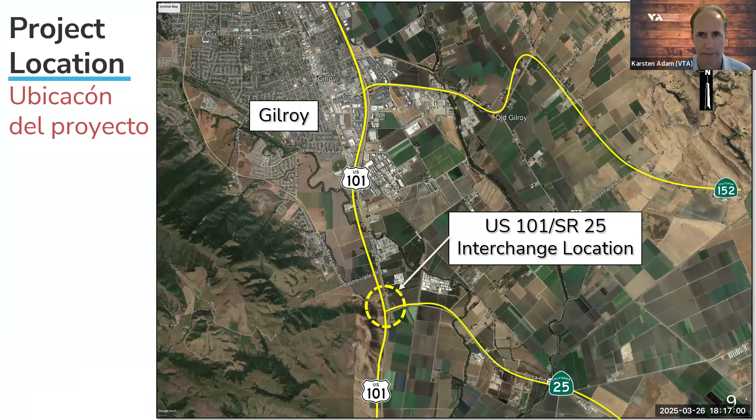A new State Route 25 overcrossing would be built above US 101, just north of the existing overcrossing, with a widened bridge. And Santa Teresa Boulevard would be extended from the new 101/25 overcrossing to Castro Valley Road.

All the interchange ramps would be reconfigured. New frontage road connections would be made for adjacent properties that could no longer connect directly to State Route 25 or US 101. Access between Castro Valley Road and Mesa Road with US 101 would be terminated. New bicycle path connections would also be provided by the project, so bicyclists would not need to access US 101 in this area.

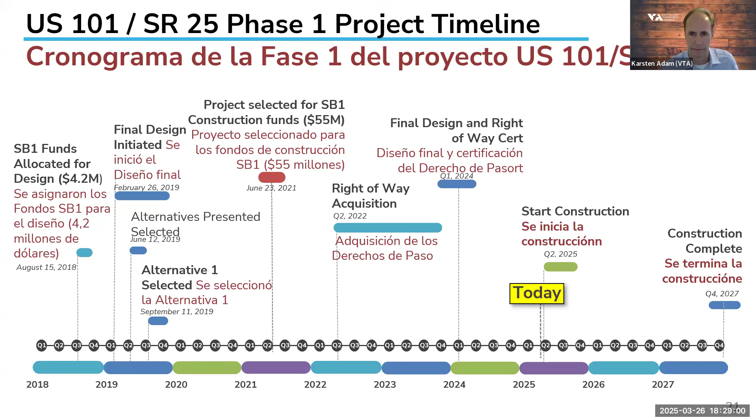Thank you, Karsten. And like Karsten said, now we have Bharat Patel, our resident engineer with VTA Highway Capital Program, to share what to expect during construction. Bharat? You're on mute, Bharat. I apologize. Thank you, Karsten, and thank you, David.

Now let's talk about what you can expect when construction begins. Some of the major activities include tree removal to clear the way for improvements, as well as temporary lane closures and detours to help keep traffic moving safely. You'll also see temporary restriping and lane shifts, along with the installation of barriers to separate work areas from active traffic lanes. Throughout the project, crews will be using heavy equipment for concrete and pavement work. And at a certain point, bridge demolition will also take place.

We'll also have bridge demolition to clear the way for new structures. Throughout the project, dust control measures will be implemented to minimize air quality impacts in the area. Next, pile driving for bridge foundations will take place, ensuring a strong and stable footing for the new structures. Additionally, crews will be trenching to install necessary underground utilities and infrastructure. There may also be occasional night shifts to complete critical work while minimizing daytime traffic disruptions.

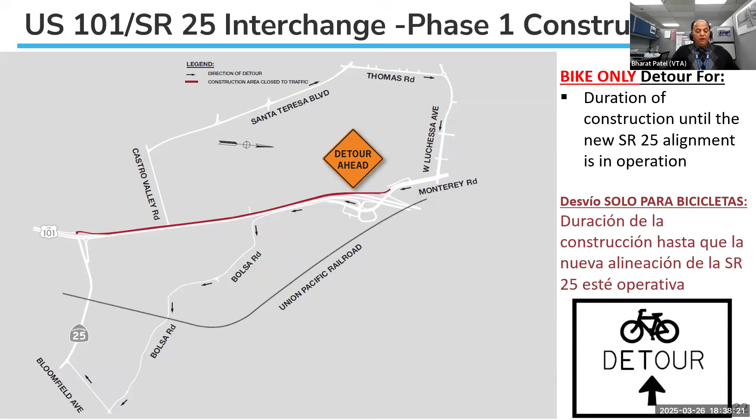Now, next, please. Thank you. Now we'll talk about the construction schedule.

This slide provides an overall project timeline from start to finish. Construction will begin in April 2025 with the goal of completing the project by the end of 2027. Following construction completion, there will be a plant establishment period that will last for 1 year. This ensures that all landscaping is properly established and maintained before the project is fully wrapped up.

As we begin construction, there are several major activities to expect. Currently, we are working on utility relocation to accommodate the new project layout. Alongside that, tree removal will take place to clear necessary space for construction. Additionally, there will be a permanent closure of Castro Valley and Mesa Road, which will restrict access to and from US 101. We understand these changes may cause inconvenience, and we will keep you informed on any further updates as we move forward.

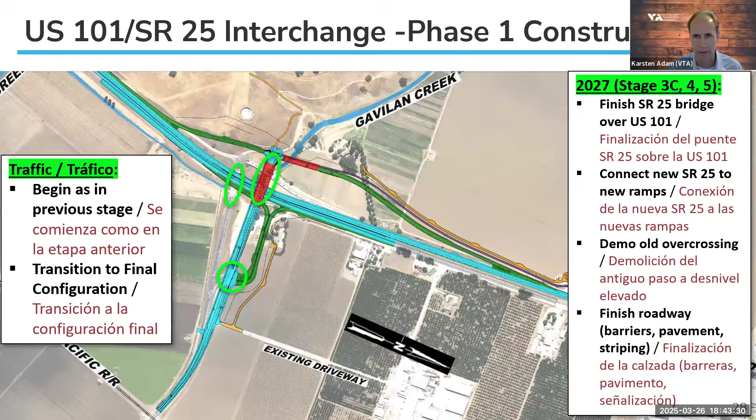Yeah, so I guess I'll take a stab at that too. I've actually seen a lot of questions about why don't you add more lanes, why don't you improve the ramps, why don't you modify the bridge. There's a lot that we would have liked to do. So I guess if you go back a couple slides to the ultimate project...

At the beginning, I introduced the ultimate interchange project that was environmentally cleared back in 2013. We would have liked to build that project, which would have basically done all the stuff. It would have provided the Santa Teresa connection, upgraded ramps, widened 101, and provided the flood relief that's needed out here. But to build that ultimate project, we're approaching about $1 billion to get it funded and constructed. Based on our funding, we did the best we could. We were able to secure just north of $100 million for the project. So we're basically doing the best bang for the buck we can with that money, with the phase 1 project, building portions that can be reused for the ultimate project, but also at the same time providing some immediate relief.

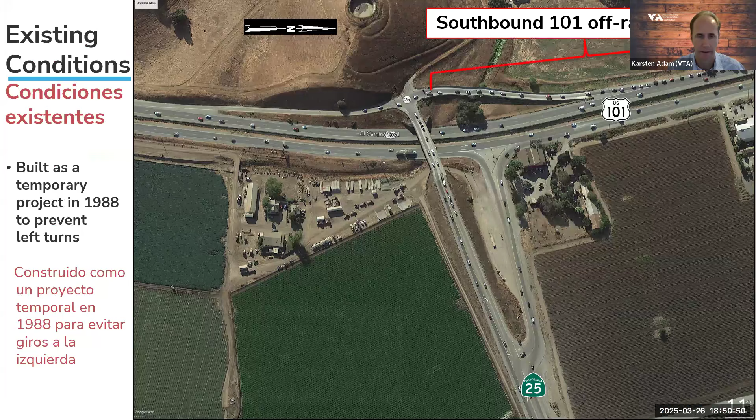Yeah, there we go. That's perfect.

So the question is, will there be any connection from Santa Teresa or Castro Valley Road to southbound 101? As part of this phase one project, no, there will not be. We're closing access at Castro Valley Road, Mesa Road at 101. The reason for the Castro Valley Road closure is the off-ramp exits right there, so we can't have vehicles going from Castro Valley Road entering 101 right where the new off-ramp is exiting.

We did look at some configurations during the design phase where we attempted to have a connection from Castro Valley Road to the new off-ramp, so vehicles could still flow through and access State Route 25 and then go back onto 101 if they want to. However, none of the design configurations, and we had a bunch of them, met Caltrans design requirements, so none of them were approvable. So we tried, but unfortunately we're not able to provide access from Santa Teresa or Castro Valley Road to 101 or 25.

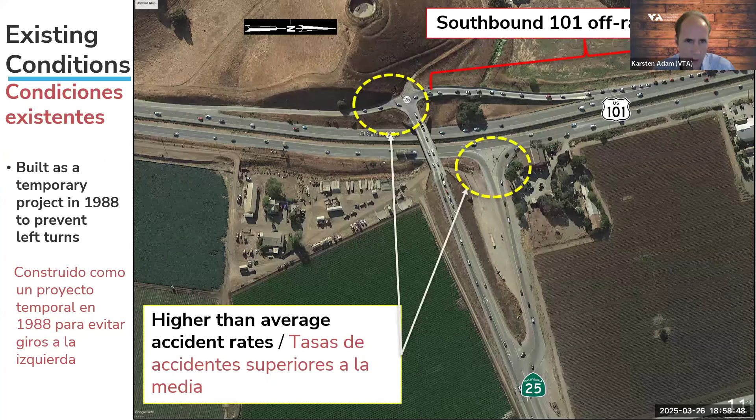Thank you, Karsten. We do have a question specifically about Mesa and Castro Valley Road. What measures will be put in place for the Gavilan College community when those roads are closed permanently to access 101? For example, if there's an emergency evacuation, is it part of the contractor's traffic plan to ensure there is notification, or what measures are being put in place to make sure the community college traffic is aware of this closure and what the new routes are?

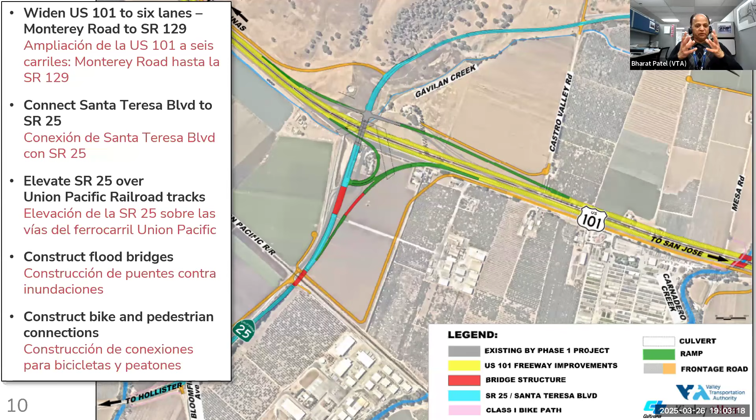I agree with what Karsten says, only the entrance is closed, not the streets. So the streets become cul-de-sac. It's not that the streets are permanently closed. That's all I want to add on that.

Thank you, Bharat. Bharat brought up a good thing I forgot to mention. One of the first things I do when I hop in my car, I turn on Waze, I turn on Google Maps, to see what the traffic is like and the best route to get there. These platforms and any others need to be made aware when these road changes happen, in Mesa, Castro Valley, so that information is up to date. We'll be working with those digital platforms to make sure wayfinding apps are accurate. That'll be one of our responsibilities in communications as well.

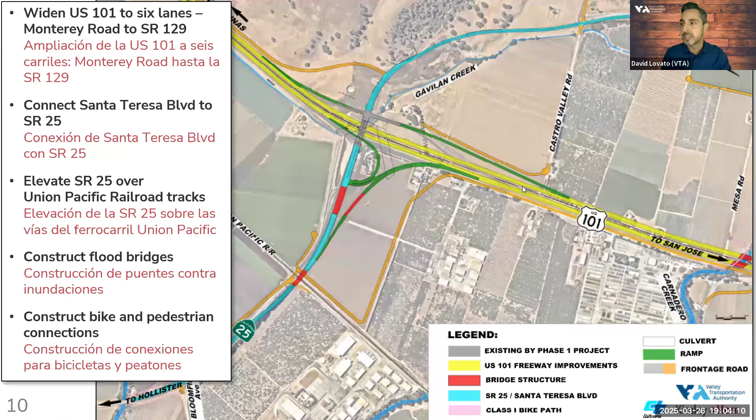Kathleen, can you bring up the slide about how to coordinate with us, community outreach? I think it's slide 37 on communications. Someone's asking us to bring that up, which is great. If we need to bring up a slide for you to review, or you want to take a screenshot, let us know.

Here's our information about how to stay in touch with us. The community.outreach@vta.org is our department's email. We also have a phone number you can call or leave a message, and one of us will get back to you. Visiting the project website too is the best way. And again, we always encourage you to subscribe so you get direct information.

One of the questions was, will the slides be posted to the website? Absolutely. This meeting is being recorded and we'll upload it to the project webpage. We're also planning to make all slides and the entire presentation in Spanish, which will be uploaded and shared with our project stakeholders.

There's also a question about communication to Hollister residents. Great question. This project ultimately connects two different commuting traffics, some in Santa Clara County and some from San Benito County. If you're registered to get updates for this project, you'll also be notified of the mobility partnership. VTA coordinates with San Benito County, City of Hollister, Santa Clara County, City of Morgan Hill, and City of Gilroy. All of these agencies come together and coordinate on communication.

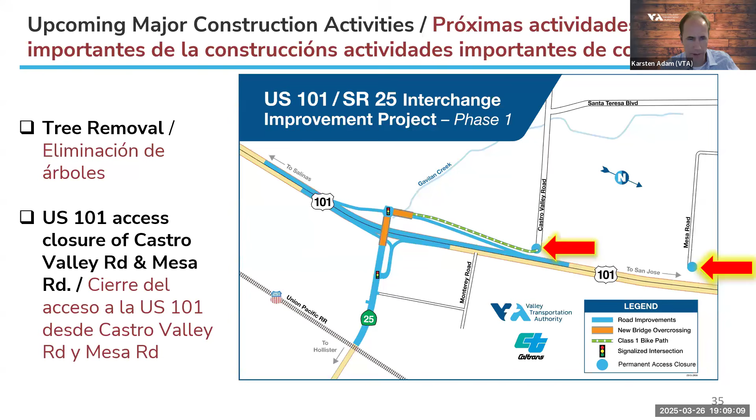Slide 18 zooms in on the northbound ramps intersection. There was a question about whether the barriers on the 25 northbound on-ramp to 101 would start by the railroad. They may have been looking at the ultimate interchange. For the phase 1 project, the northbound ramps will basically be configured pretty close to what's out there today. They'll start where the existing northbound ramps intersection is, and they'll be barrier separated. That will be a safety upgrade versus today, where the northbound off-ramp and on-ramp are basically right next to each other with no separation. With this phase 1 project shown in green, the ramps will have a barrier separating the on and off ramp. There will also be permanent lighting, and the transition points will be lengthened with reduced access points, meaning less driveway access immediately near the on-ramp. Those are all safety improvements that the phase 1 project will implement.

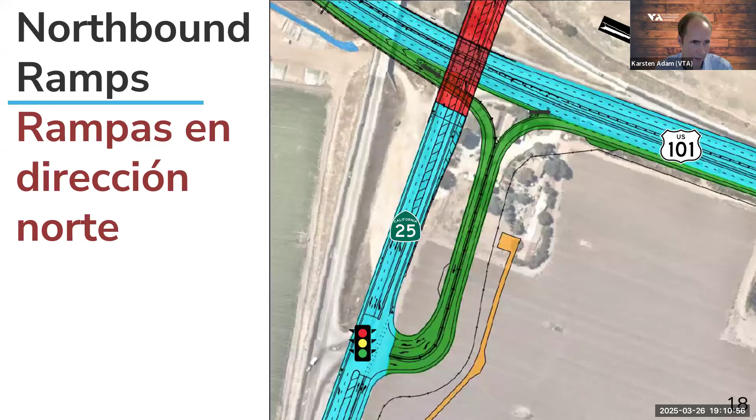Thank you, Karsten. One additional question: will the 101 southbound 3-lane continue from Monterey to the new 25? Can you repeat that question? Yes - will the 101 southbound 3-lane continue from Monterey to the new 25? Could you go to slide 15, which shows the overview. We're not really doing construction north of Castro Valley Road, which is on the very right side of the screen here, so we're not doing improvements on 101 north of there towards Monterey. What's out there today will remain on the main line of 101 until you get to this project area. Even then, we're not doing much on 101 - we're just shifting it over a little bit, but not adding any lanes. We're just reconfiguring the ramps at the interchange. Hopefully that answers the question.

Hey David, if I want to add a little bit to that, may I? Absolutely. I want to mention that during construction, whatever the existing number of lanes we have on US 101, none of the lanes will be taken out during construction. They will all be in place while we do construction.

Thank you, Bharat. Thank you, Karsten. I wanted to go back - there was a question I missed towards the beginning about a roundabout. We have a new signal going in from the off-ramp to the 25, and the question is why not a roundabout there instead - was that part of the initial designs, and why signal instead of roundabout? We looked at a ton of alternatives when developing this phase 1 project, including a diverging diamond interchange, direct connectors, and a connection from Santa Teresa to the off-ramp. We looked at all sorts of configurations, but ultimately landed on this phase 1 configuration because it provided the most safety benefits and operational improvements. As part of the process, we do what's called an intersection control evaluation, looking at different ways to control the intersection, including a roundabout configuration, stop signs at all the intersection legs, and traffic signals, which we ended up choosing. Based on the evaluation, the traffic signals we're proposing provided the best operational benefits and safety for the design.

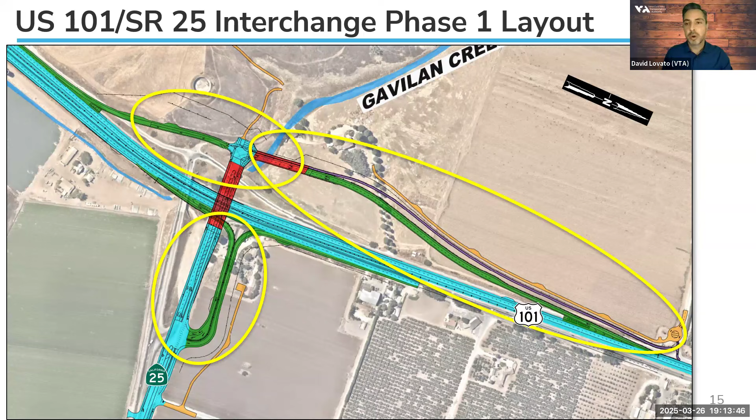I wanted to go back to part of the communications we plan to do. We've done in-person meetings to get everybody to meet the team and answer questions in person. We also offer virtual because, quite frankly, it's often the most convenient way to get information, and we can record it and push it out there. But I also want to offer our services and communication to come to you.

If you have a neighborhood association, an HOA that has meetings, or a community group that would love this presentation, whether in English or in Spanish, we can come to you. I wanted to put up this information again: community.outreach@vta.org and our phone number. Invite us, and we'll bring this presentation to you.

I think we got it down to maybe about 15, 20 minutes. Maybe we can get it down a little more, but we'll see. We wanted to offer to come to you. It's always easy to bring this information to you, however it fits, especially if you have specific questions about this project, and we can tailor our presentations.

We are planning to visit Morgan Hill City Council soon and provide a brief presentation on this. We look forward to working with the communities and continually providing this information.

If you signed up for this project, you'll also be notified when the quarterly mobility partnership meetings are held. These are virtual, these are hybrid, and you can zoom in and hear not only about this project update, but also upcoming projects: Phase 2, Santa Teresa Boulevard Extension, and information on 152.